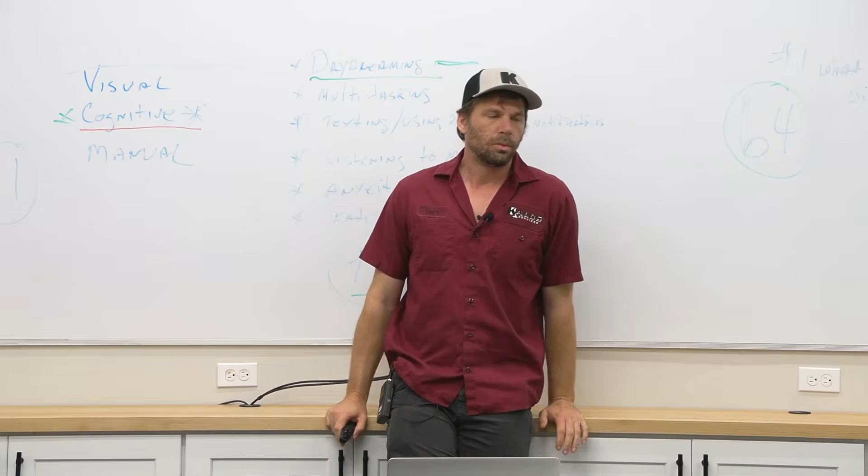We're talking about when you go to a service call and you diagnose a failed compressor, and the process of diagnosis surrounding that. We're quoting a lot of compressors, and we're seeing a lot of compressors quoted without a lot of other notes about the system or quotes related to the rest of the system.

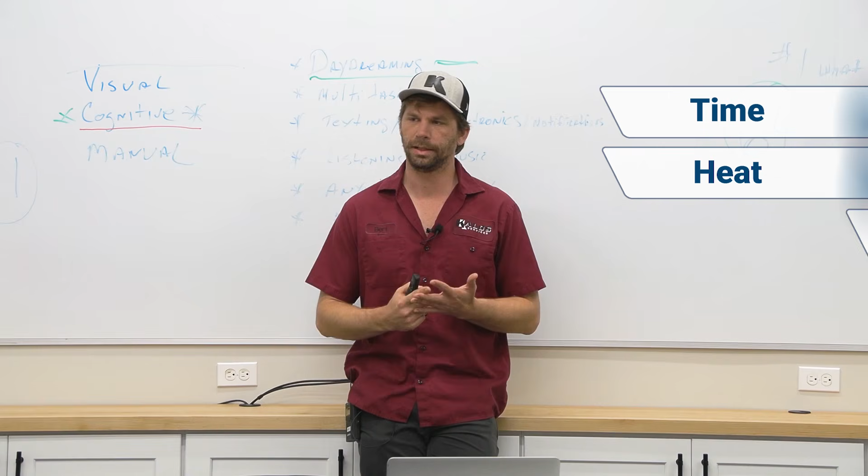Compressors generally are made pretty hardy. It takes a lot to break them. It takes a lot to actually break down a compressor—a lot of time, heat, acid, or electrical issues to cause a compressor to fail.

So when we have a failed compressor, what should we be asking ourselves? What killed this compressor? Who did it? You got to make sure you ask those questions. What in the world killed this compressor? How is this possible?

Acid is one of the number one compressor killers out there. It's also the number one cause for the second compressor death—so you replace a compressor, and the second one dies, the number one cause is acid.

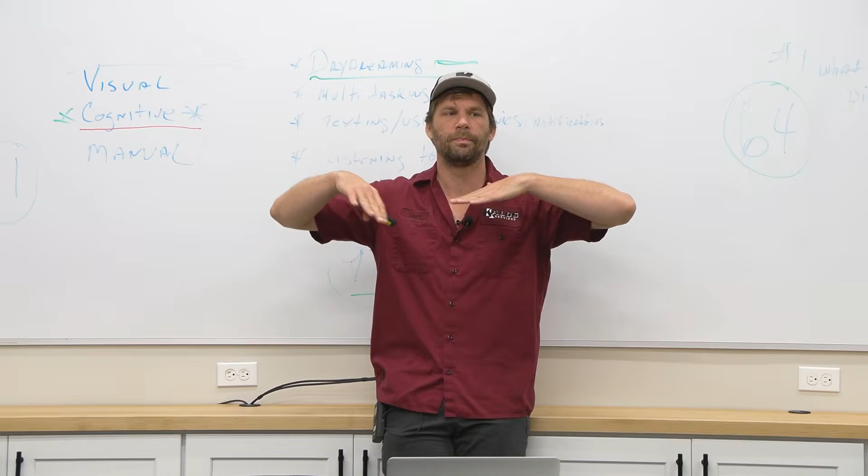Anybody know what causes acid in a system? Water, moisture. Yeah, I'm hearing a lot of moisture. So moisture causes it because with 410A refrigerant, you have the POE oil, the polyolester oil. Moisture in the system interacts with the oil and it becomes a form of acid. That breaks down the oil's ability to lubricate the compressor and keep it running smooth and clean over time.

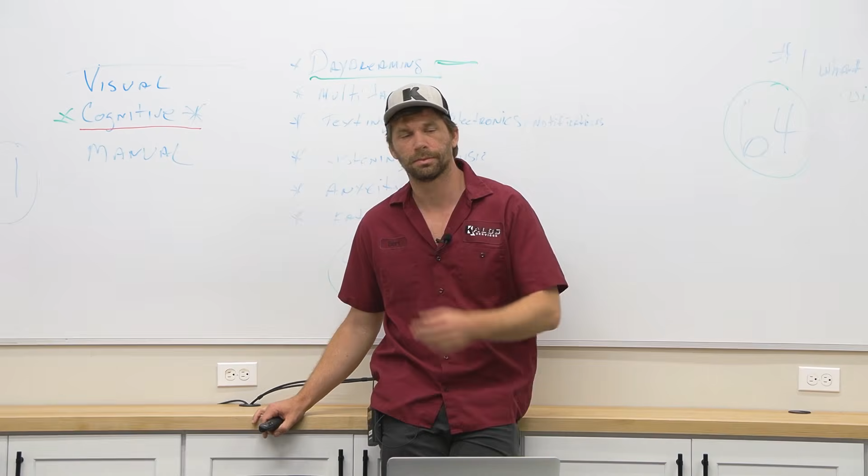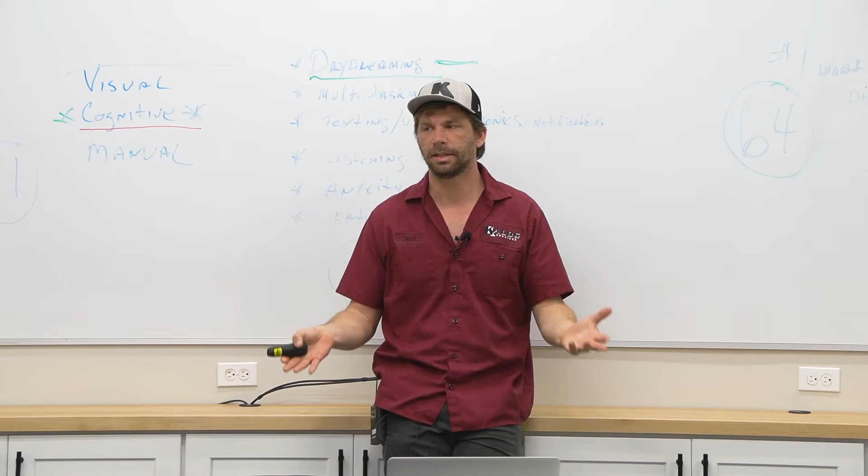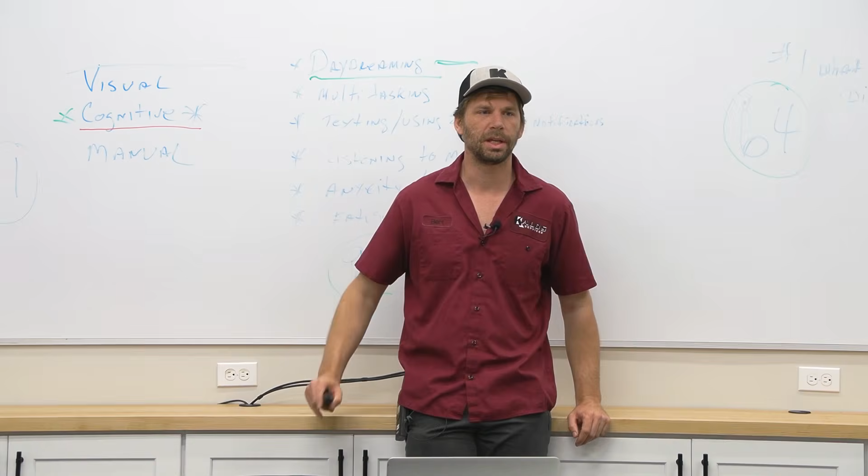But what I want to focus on today is when you show up and you're diagnosing a compressor, we need to be taking steps to address the whole problem, not just quoting a compressor. Diagnosing a compressor is kind of a fun diagnostic hit—it's a big failure, you've just proved something, you've shown that you're a technician. Maybe this turns into a system sale. That's exciting, but we need to slow down right there and run through whatever we can to figure out what killed this compressor.

Another thing that causes acid is high heat inside the compressor. Your compressor oil will deteriorate with high heat. If you have a scenario creating really high temperatures, like impacted, clogged condenser coils, running at a really high temperature can break down the oil over time. Or when you have a compressor burnout, where electrically there's a burnout in the compressor, that really high heat moment can cause your oil to deteriorate. You've got oil in the system that actually needs to be removed because it's going to be acid at that point, and it's going to cause damage to your next compressor.

So what do we do if a system has acid? Or how do we know? Let's start there—how do we know if a system has acid?

Acid test. Yeah, we have different kinds of acid test kits either on our van or here at the shop. There are a couple different kinds out there, but they all do the same thing—they test for acid. It's not like there's different kinds of acid we're testing for, just different formats. I'm sure there are different kinds of acid you could test for, but with what we're working with, 410A refrigerant, pretty much exclusively, yeah.

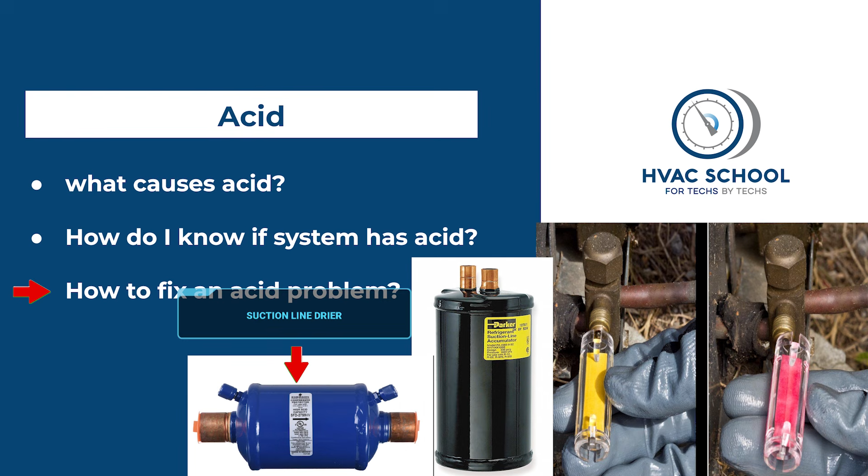Replace the compressor, refrigerant, the accumulator, suction line drier. Yep, it requires a second trip, acid flush, acid away, some sort of acid treatment. And so when you are diagnosing a compressor, that's kind of important to know before you're sending a quote, right?

What we will often do is replace the accumulator because that's where oil will gather in the bottom of an accumulator, right? And so you can't always get all of that out. If you're worried about acid in the system, it's best to quote just replacing the whole accumulator. Whereas on a normal compressor replacement, you can typically take that and dump the oil out, but you're never going to get it all out. If there's acid in there, just quote to replace the accumulator.

And then do you worry about indoor components too? Like does the TXV get damaged or anything like that? No, like Ronnie said, you can contribute to coil breakdown. So if you have an aluminum coil, you need to be thinking about leaks. So that would be our suggestion next.

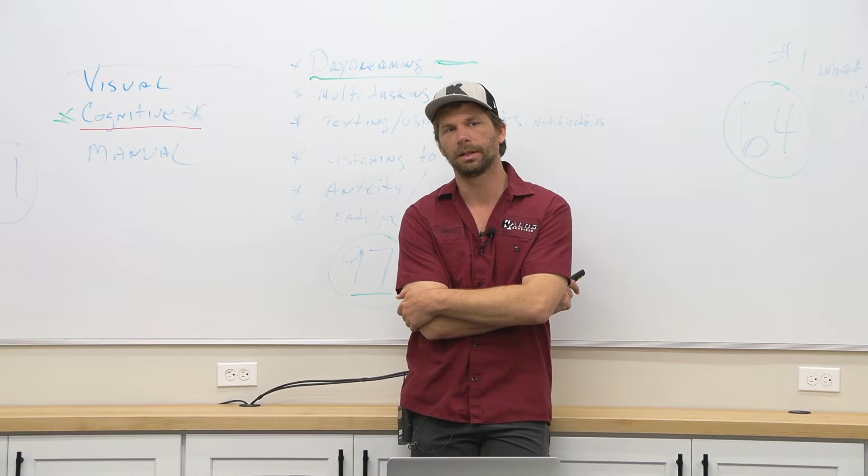If you had like an acid compressor failure, and maybe it's the original coil on a mid-aged Lennox, like an 8-year-old Lennox, and you do an out of warranty $3,700 compressor there, and you know the system has acid, well, that coil's probably not too far away. Gotcha. So you kind of want to keep that in mind if you're going to be quoting large repairs like that. The system does have acid. You could see coil failure in 3 months and then they hate our guts.

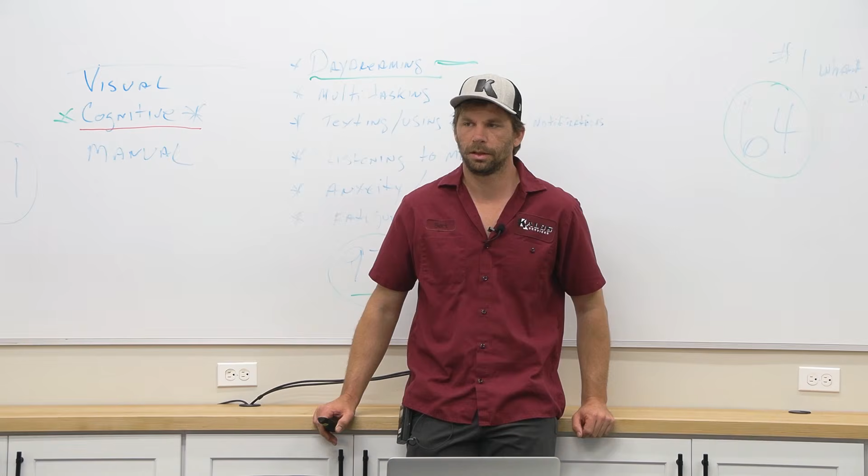Right. Would you do it the other way too? Like if you found a leak in a coil because you were low, would you do an acid test just to see? I guess if you have one, it never hurts to do an acid test. Yeah, but typically if it's through the whole refrigerant system like that, you're gonna smell it.

And that's another point on burnouts sometimes. The oil has been turned to acid, but the compressor didn't run after that burnout event. And you go to cut open a compressor, and all of a sudden it's really strong. You can smell it. There's definitely acid in the system, and you have to stop and take some of these steps, whatever we've quoted, to actually make sure we're not going to be out there replacing a warranty compressor in 9 months.

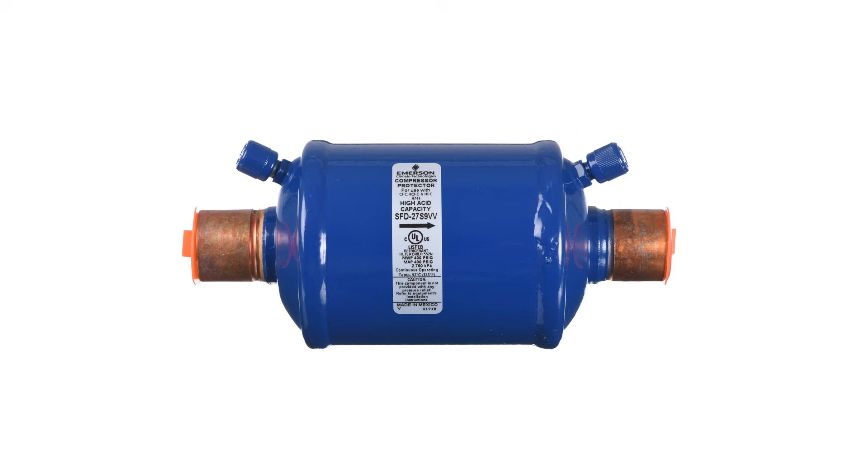And also installing a suction line drier. You notice on the suction line drier there's only a one-way arrow. So when you're installing a suction line drier, it needs to either be inside where the refrigerant is only going to flow in one direction, so between the reversing valve and the compressor, or it's in summer and we're going to be back in 10 days, you put it outside on the suction so we can pump down instead of recovering the whole refrigerant when we come back.

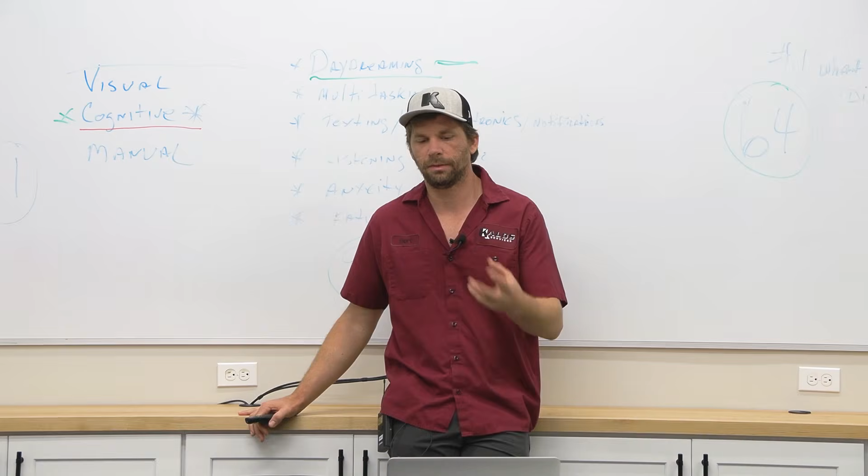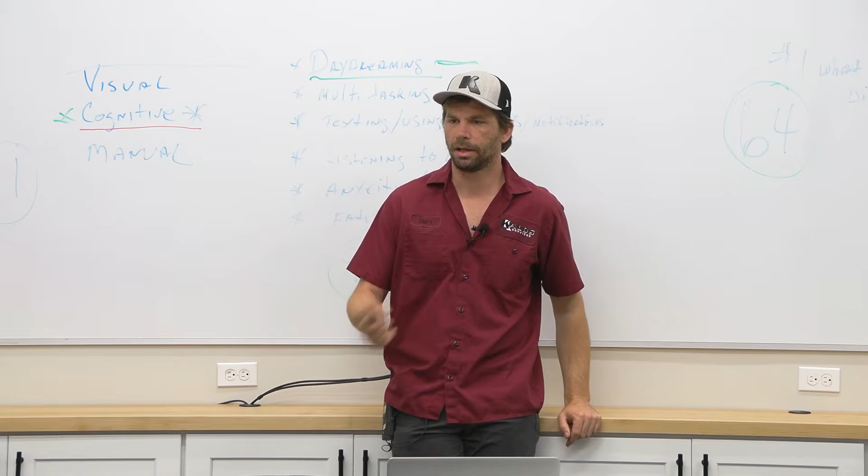So that process is we install a suction line drier and it picks up contaminants in the refrigerant over the next week, 10 days, 2 weeks, and then we come back and we cut it out. Best practice would be to install another one and leave it permanently in the system. That one is full of contaminants, possibly bits of acid that were sitting in a coil or a low spot in the suction line. So we take that line drier out, replace it, leave another one in there. That all needs to be thought about when you're quoting that repair, so Buddy has all the information he needs for sending that quote.

How long does the suction line drier stay in? Usually 10 days to 2 weeks. And then you replace it with another suction line drier and just leave it. But if it's a heat pump, you can't just have an external suction line drier. It's only one directional flow. So you could put it inside the condenser permanently once you had replaced that one after 10 days.

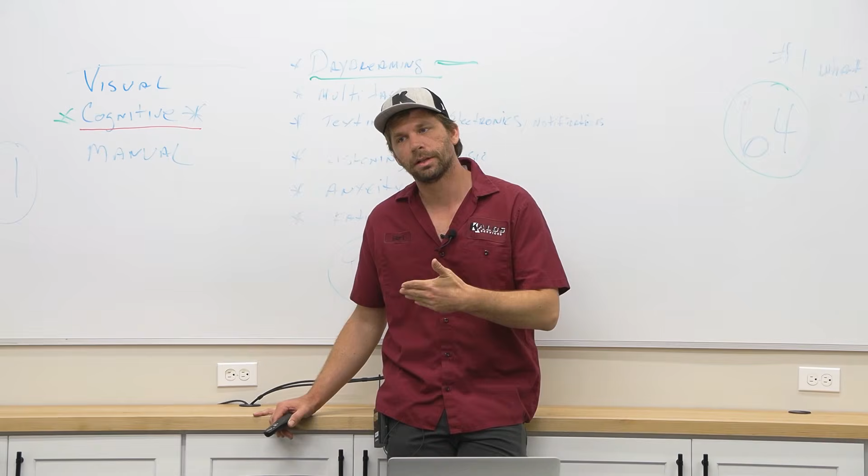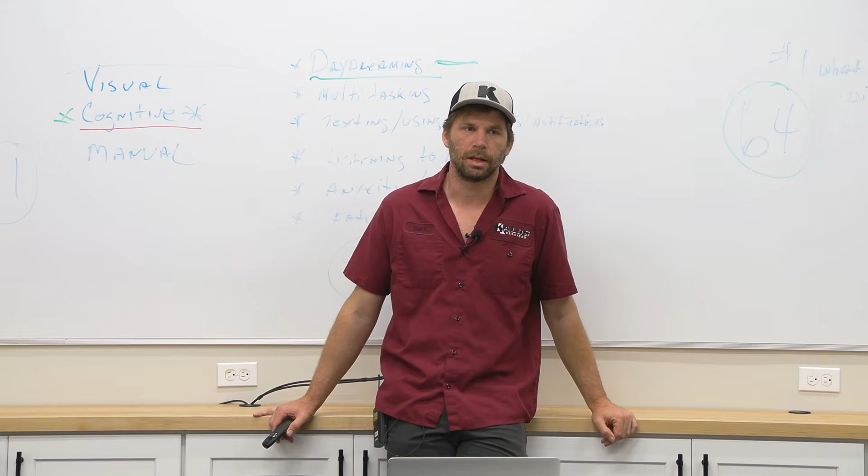But we're not leaving any suction line dryer in our suction line, because in the winter that suction line turns into a discharge line flowing in the opposite direction that this filter is designed for. And if it doesn't completely destroy that filter and knock it through the system, it will blow out whatever it's caught over the years into the rest of the unit.

Airflow considerations. How many times have we quoted a compressor and found things like this on the job, right? More than once. How many times have we gone back to replace a compressor, turned it on, and things look awful? And we walk through the house and find stuff like this. That's why we're having this class, because we can't be replacing a compressor with a coil that looks like this, right?

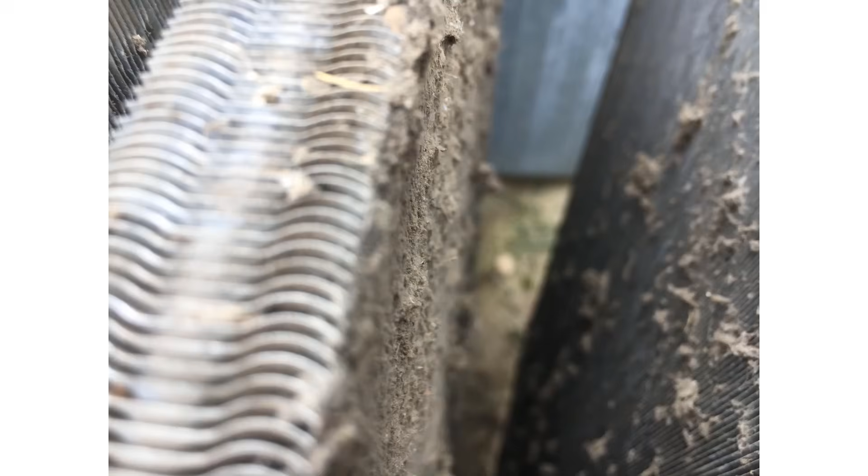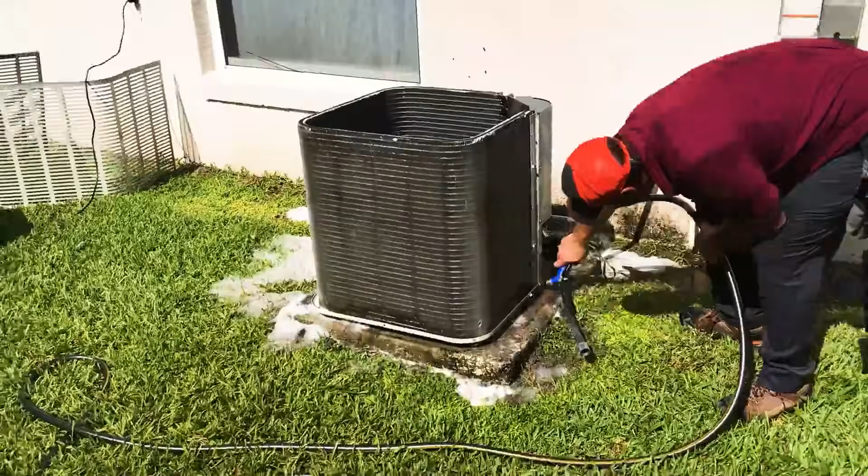Without addressing that problem. When your compressor goes out, how is it the airflow might have affected the death of that compressor? Heat. Okay, heat stays in the refrigerant. Higher temperature, higher heat. So you have the condenser coil here, slam dirty, high temperatures, high pressure, a lot of strain on that compressor. So you should be looking at those coils and making cleaning them a part of that process.

When you're replacing that compressor, if you see dirty coils and it hasn't been quoted, you're still going to wash those coils, right? I said replace, I meant wash. I remember replacing a compressor and finding a second filter. So they had one in the nice ceiling spot, and then right under the unit, another hidden filter that was slam dirty. So the compressor had failed, and for years they had replaced just the primary filter.

Check for issues with the rest of the system that might have caused that compressor failure. Dirty coils, dirty filters. Also, what are some other things for airflow that could cause issues? Giving you some hints here. Blower wheel, collapsed ductwork. Ductwork issues, crappy ductwork issues, right? Things blocking a return. Anything that's going to cause low airflow could create a slugging situation.

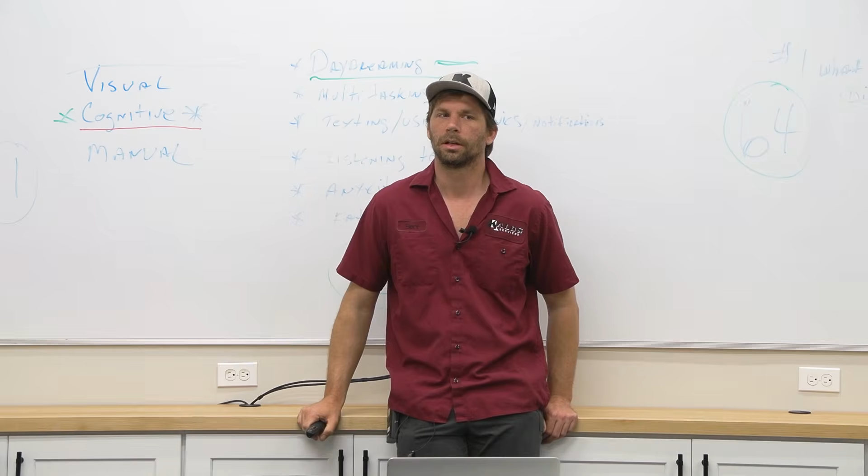So if you don't have enough heat on your coil, you don't boil off all the refrigerant. The heat comes from the air. So if you have an airflow issue, then you potentially are not boiling off all the refrigerant through these run times. You combine that with a home where the customer likes to keep things cool in their house. Now we have even less heat to work with. The compressor has these long run times where liquid is making it back into the compressor.

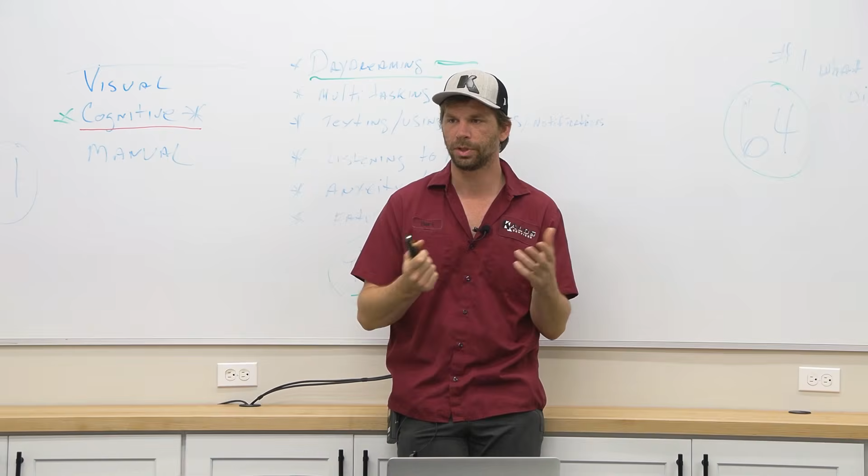And that can cause two problems. It can turn off and the liquid will kind of migrate and accumulate there, and you have that start where the compressor tries to start and it's just hitting liquid, which can destroy a compressor. Or you could actually have long enough run times where liquid fills up the base of that compressor and gets to the point where the compressor is attempting to compress liquid, and liquid doesn't compress well. Liquid will destroy a compressor instantly.

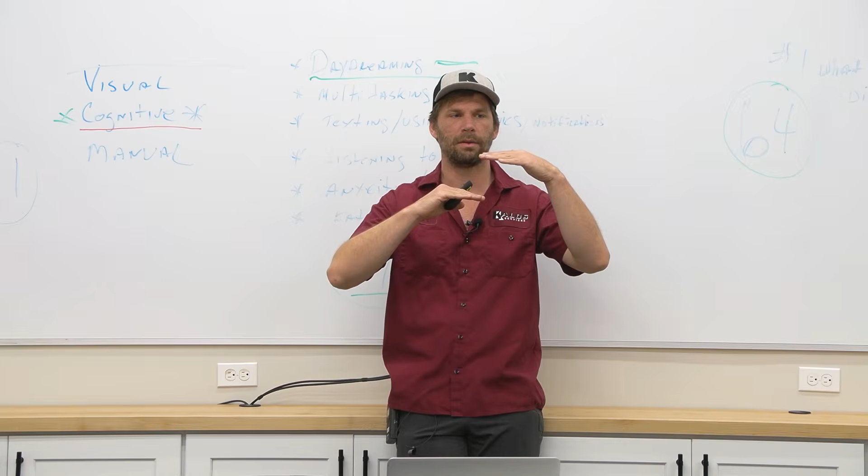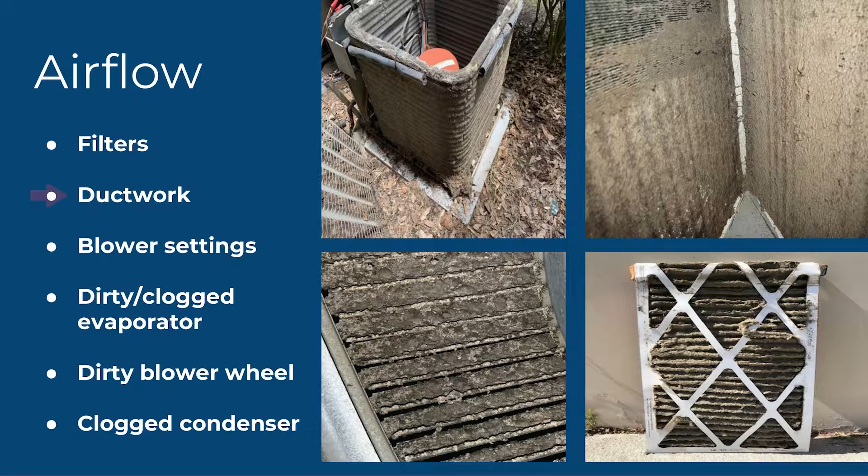So you do have some wiggle room if you have an accumulator or the base of your compressor to fill up with liquid before it actually starts compressing it. But if you have a situation where really poor ductwork is contributing, you have systems freezing, things like that, that could be exactly why the last compressor failed.

And we need to address the whole problem before we come back, plug in our compressor, turn it on, and we have this crazy low suction pressure and temperature, and now the customer finds out they need to replace the ductwork under the trailer. And maybe that would have influenced the whole decision in the first place, with a system, something like that. Those things are really important to know ahead of time.

On the airflow side of things, one other thing to look out for, damper systems. So if you're on a unit that has a damper system, go through and check your zones, check your airflow, make sure it's opening and closing properly. Same thing. It's good. I erased damper systems and put clogged condenser on here.

I would say a thing to remember too, like, let's say you have a failed compressor, and you're like, man, their coil looks really bad. I can't quote a coil and a compressor. That would destroy their budget. Who cares? They need to know the whole truth. Yeah, it's very good. So you have to go in and tell everything you find.

Even if you're gonna give them a quote that's like $8,000 and they're never gonna go for it, it's like, you're not getting a call back. Could sell a system and leave them better off anyway. So yeah, our job is to be a technician and not to worry about their budget and their decision making for their home. We just need to give them all the information that's relevant to that unit and be honest. Yeah, don't shy away from doing your full job.

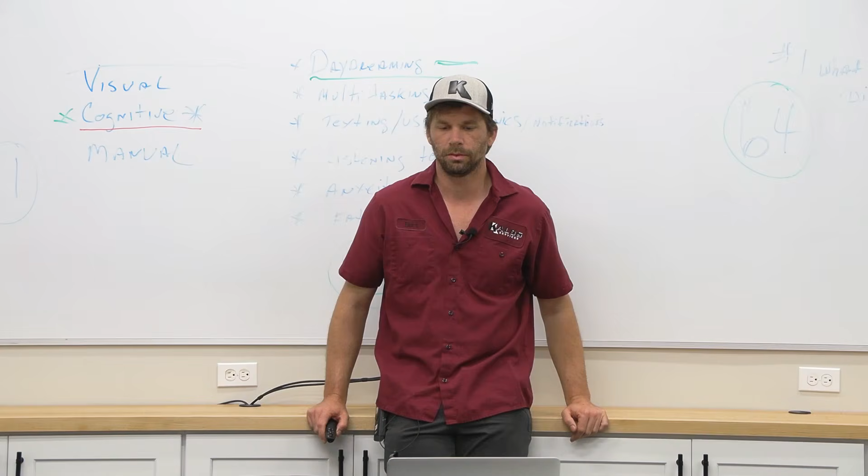Yep. Requires refrigerant to cool it down. It's running hot. It requires refrigerant to cool down. Compressors are refrigerant cooled. You run not only hot, but you also have a lot longer run times.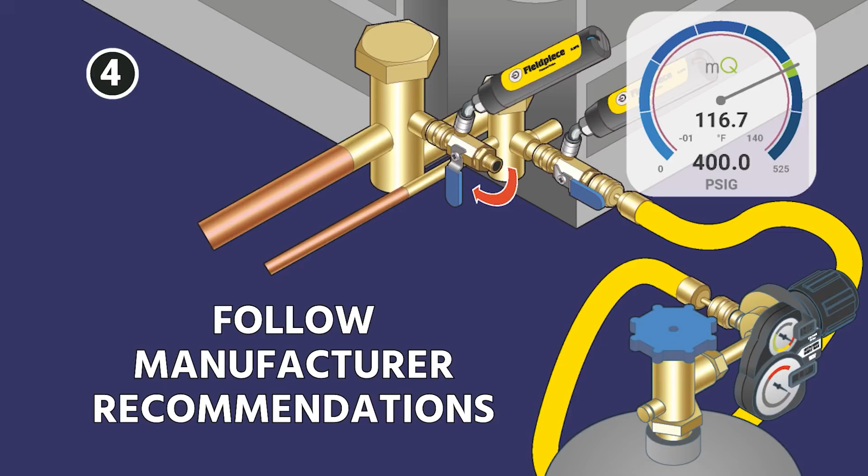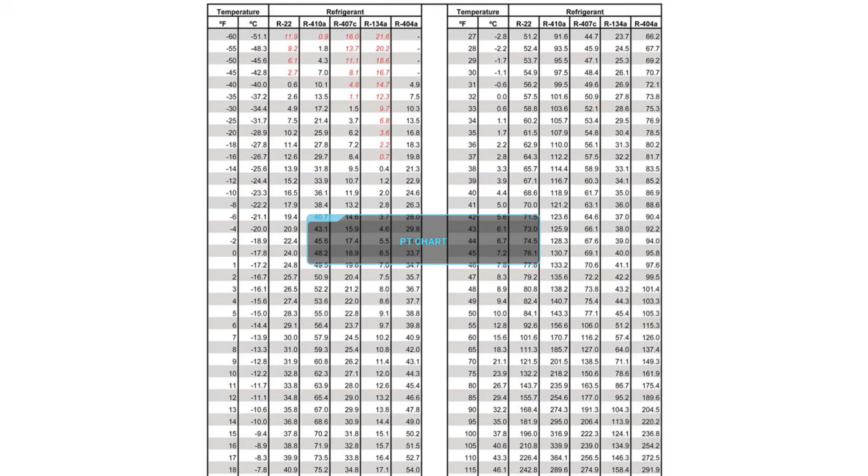How could you maybe find low refrigerant if your compressor's failed and you can't run it? Standing pressure. That's right. Put a gauge on it or something and see what it is. But if you don't know what it should be, it doesn't matter what it is. Based on temperature. Mm-hmm. Keep going. There's a refrigerant slider. Yep. So you need a PT chart, refrigerant slider, and what temperature?

Saturation should be the ambient. Yep. Saturation's ambient. That's inside, outside, sort of combined. But the majority of the temperature affecting your refrigerant is outside because that's where most of your refrigerant sits, right? But it's affected a little bit also by inside temperature. If the blower's running and it's 90 degrees inside, it would be slightly higher. But usually you can just compare it to outdoor ambient temperature, and that's the saturation temperature you should have on your refrigerant.

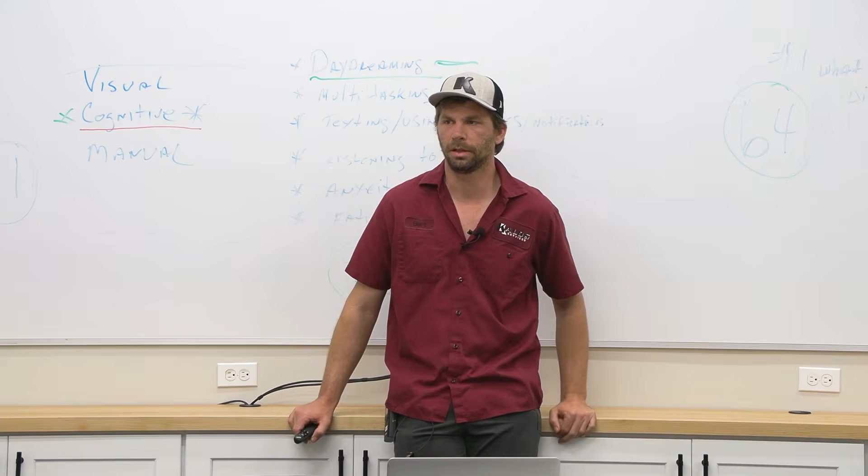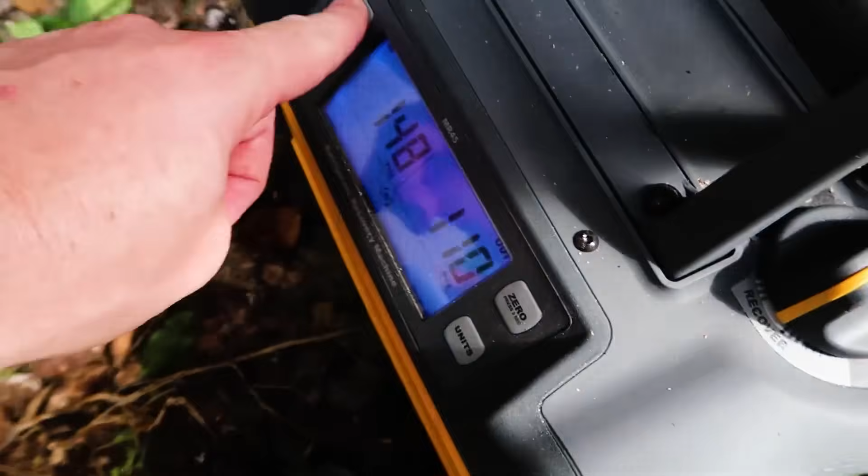Now, if you're just slightly low, you're still going to have a pretty normal saturation temperature. It takes a significantly low system, but it's also a pretty embarrassing miss for a technician who comes back with their compressor and what's the next thing on the list? Coil leaking. They weigh out the refrigerant and there's only 3 pounds on a 7-pound system. So when you are actually coming back to do the compressor, weigh the refrigerant out. Because you do need to know, before we braze in this brand new compressor, if we're low on refrigerant.

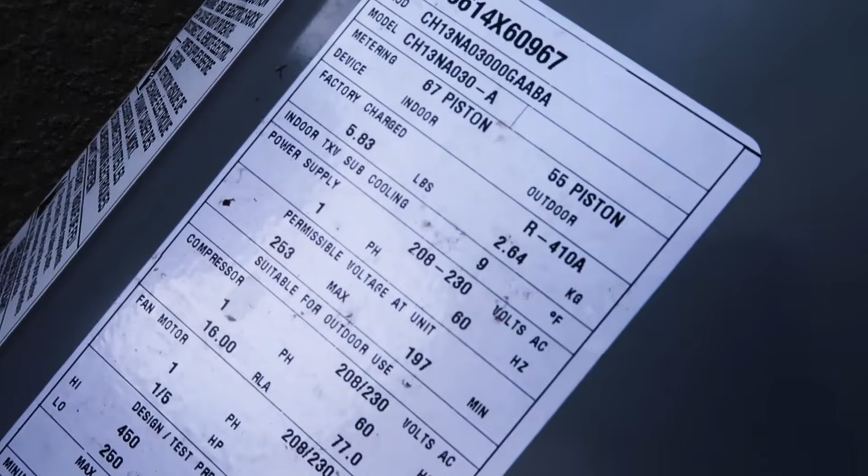You might be a pound off, but if you've done a full recovery and the purge cycle and you watch your system and it doesn't really come up after that point, you know you've got all the refrigerant out. But yeah, always weigh out your refrigerant to know what's going on.

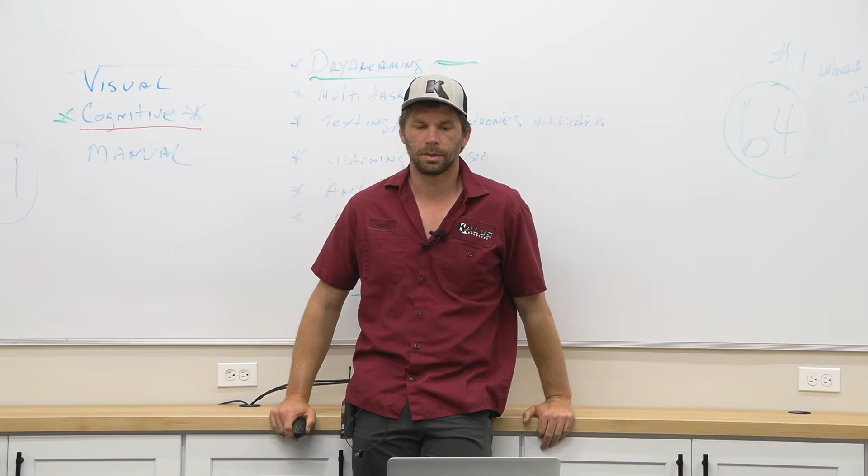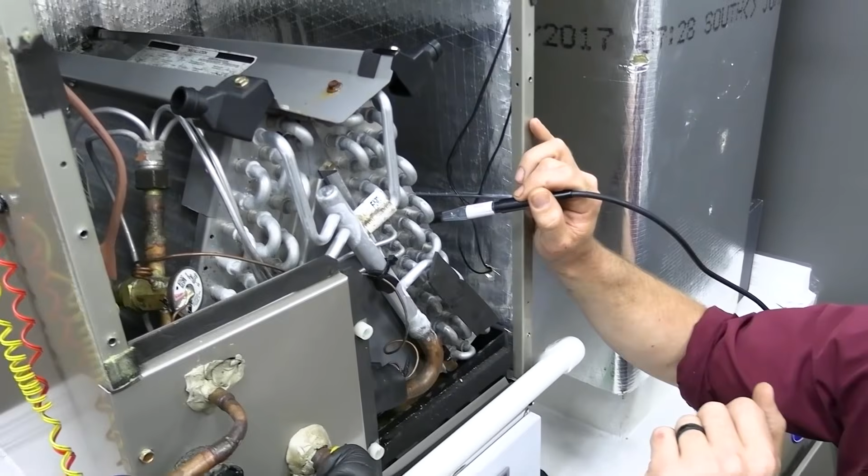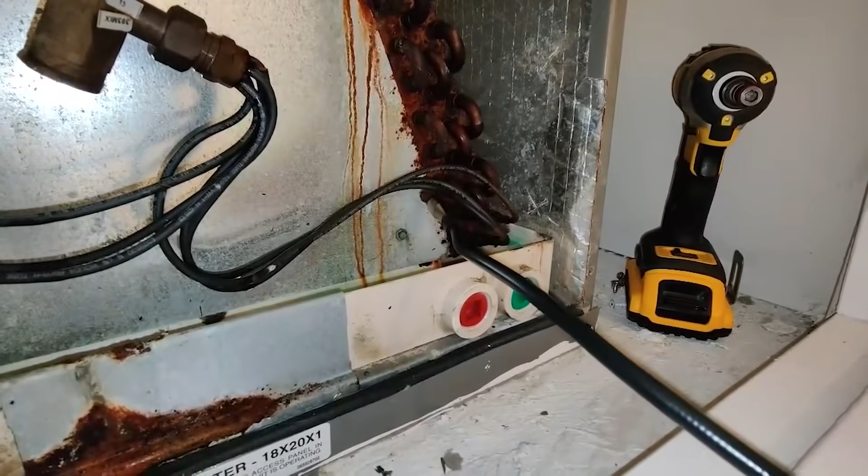Doing leak testing. So this is what Matt has brought up several times in this class and he's very passionate about because he's been burnt before. He's had to do compressors where there were leaking evaporators on the inside. I think we all care about this. But when you are quoting a compressor, depending on the age of your system, you should also be going inside and doing a quick electronic leak test on that coil, at least looking at the history: maybe we've replaced the coil, how old is this system, maybe a TXV's been replaced in the past. Is there reason to think there's issues with this system?

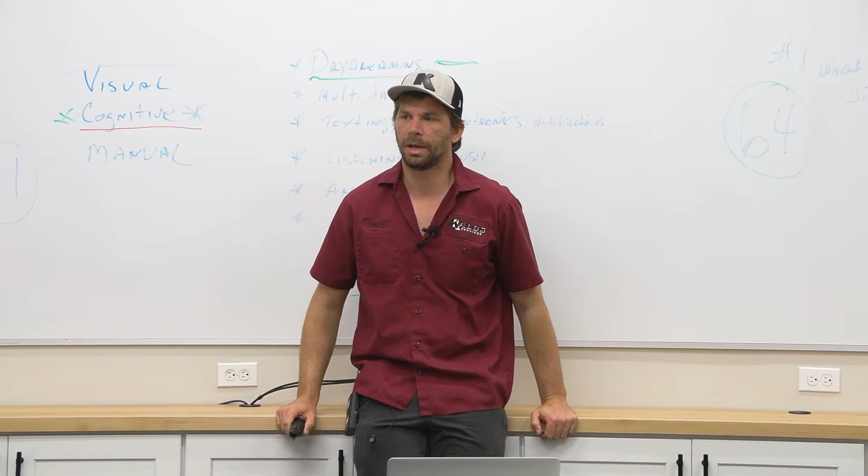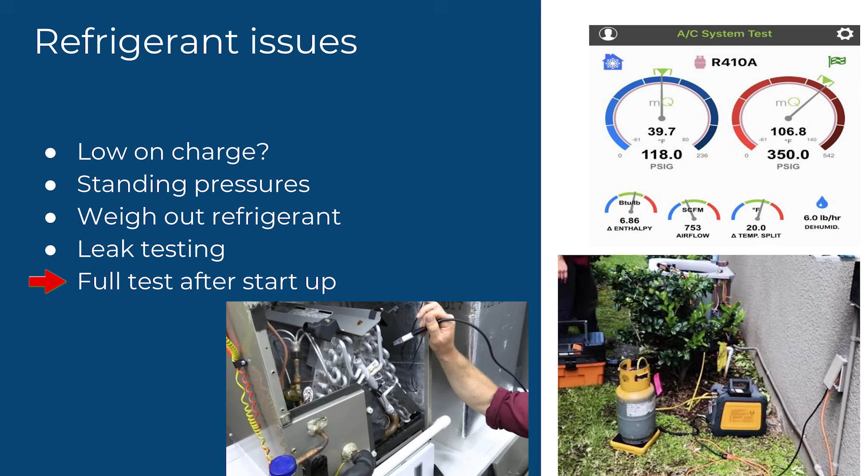A leak test is a 10-minute thing you can do on an evaporator coil before sending a quote for a compressor, to save us a complete nightmare on the back end, showing up with a compressor and not being able to pull a vacuum because we have a leaking coil, right? We need to be ready to do a full test after we start up our compressor because it could have been a refrigerant flow issue, TXV, something like that, that caused the last compressor to fail, and there's not a way to test that beforehand.

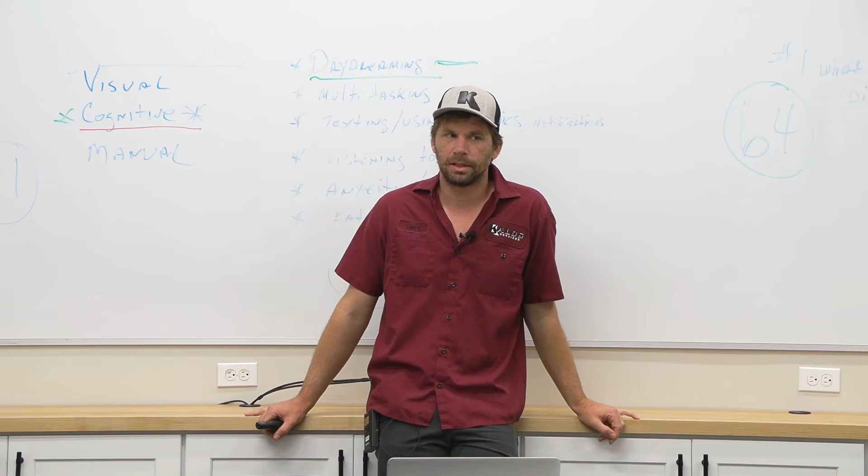And those can be difficult conversations, but just stick to the facts. Your compressor was not running, but now that it is running, we see that the TXV probably contributed to its failure, so we've got to take care of this now. And that's something we want to take care of same day if possible, as fast as we can.

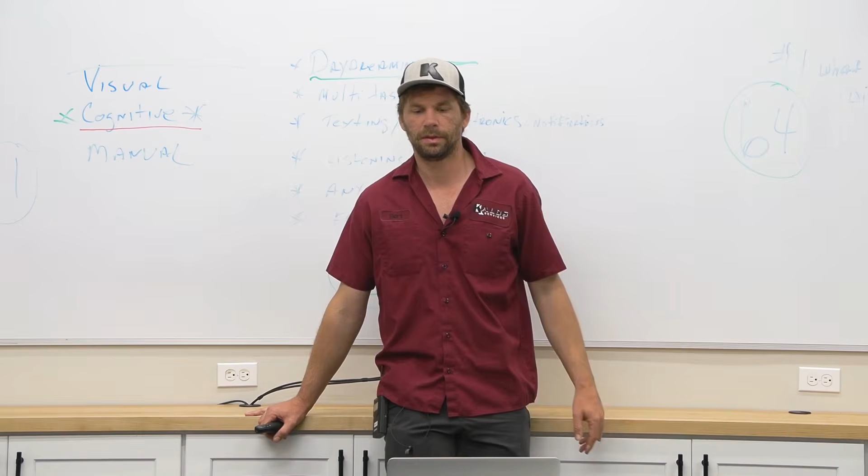Mentally, it can be very difficult to think you're finishing this project, I'm finally done, let's test it out, and boom, there's a problem. That can be one of the hardest things as a technician. But again, that's what we are, we're technicians. Simulate the best that you can a normal day, and you'll see major problems at a minimum.

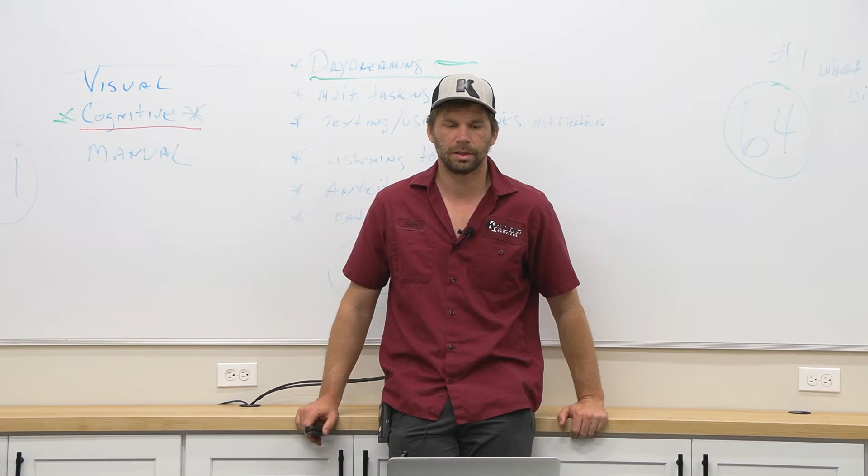Okay, electronic issues that take out a compressor. Capacitors and hard starts. Don't quote a compressor and then walk away if it has a hard start kit and a capacitor that you didn't check. Right? How would you check a hard start if the compressor's failed? Put your MFD on it. Yeah, MFD is about all you can do on that.

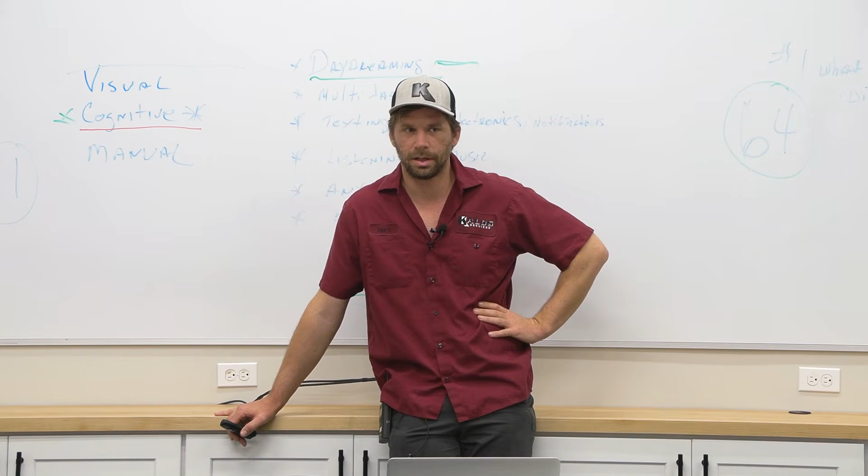So good practice, hard starts failed, or a compressor's failed, we're replacing the hard start kit with the factory hard start kit, if it's a factory hard start kit. If it just has some hard start kit on there, we're not putting a new one on with a new compressor. But if from the factory they recommend a hard start kit, then we're replacing it with a factory hard start kit when we're changing the compressor.

What else? Electronically, pitted contactors. Stuck, yep, you need to be really looking at that and thinking about it. Another good practice is to just replace the contactor when you replace the compressor. But at a minimum, get used to looking at what could have caused that compressor failure. Things like pitted contactors, it can get stuck, melted in place.

The compressor runs continuously, or just that short cycling, voltage drop across it, that all those things take out a compressor. Wire damage, how could wire damage contribute to a failed compressor? Exposed wires, it could run all the time like a stuck contactor.

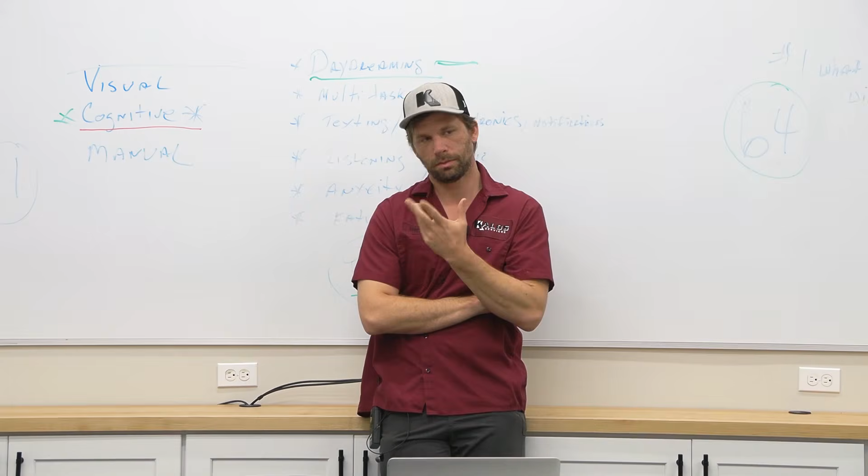So you have exposed wires that can create a short where it runs all the time. Or I also have here short cycling. You can have wires that are causing short cycling, either poor connections or the short is happening enough to chatter your contactor.

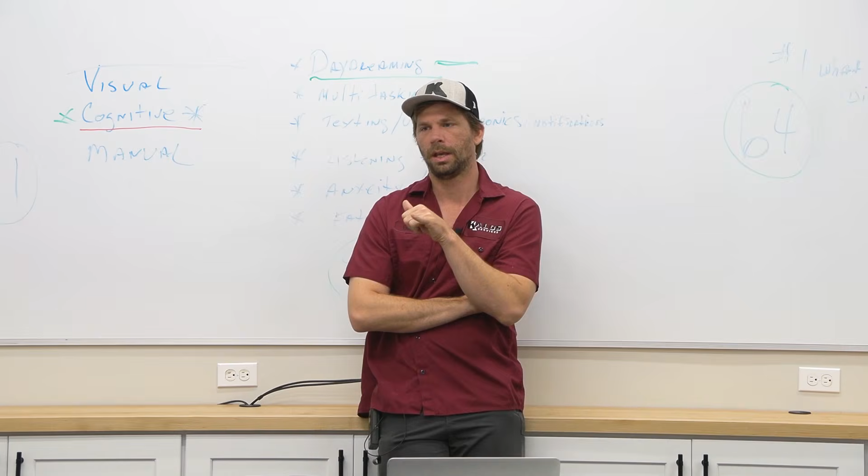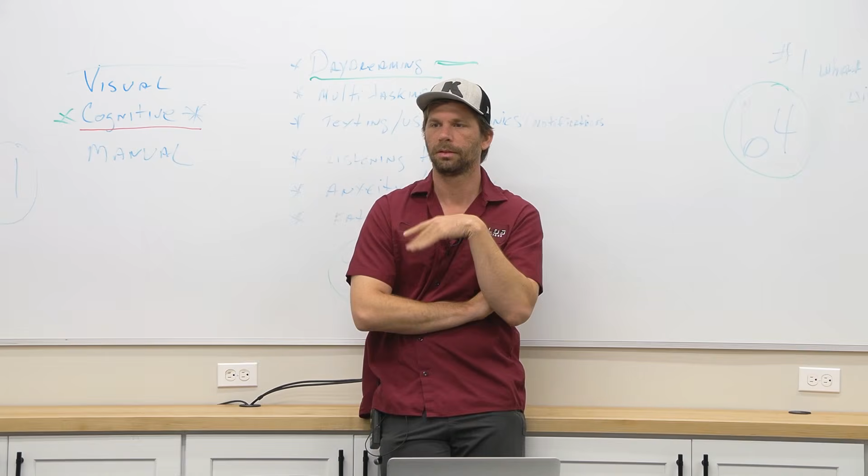Bumping the float switch after maintenance while the system's running. Yep, things that cause short cycling. So if they have a float switch design that pops straight out without a trap and your compressor's failed, I'll often just be dumping water, looking in that pan, to see if maybe the water level's been at the level of that float, which would cause that float to be chattering, causing short cycling for the system. Inline float? Like an inline or just straight out of the pan. Yep, both of those things could cause short cycling and your compressor repeatedly running backwards.

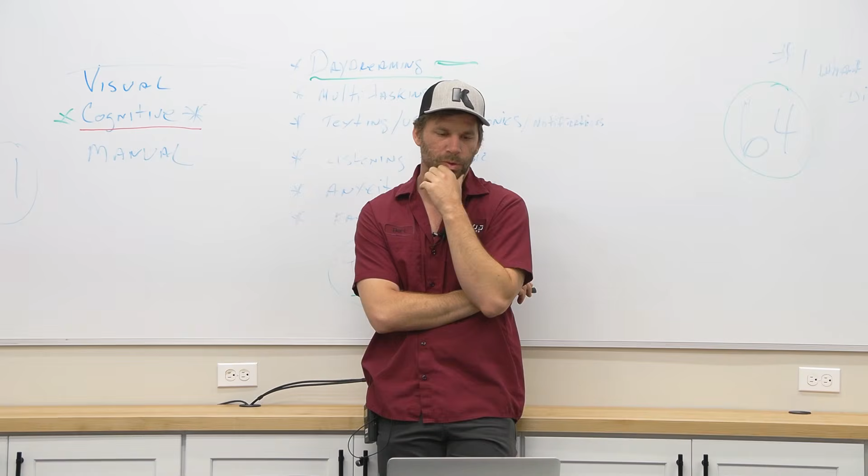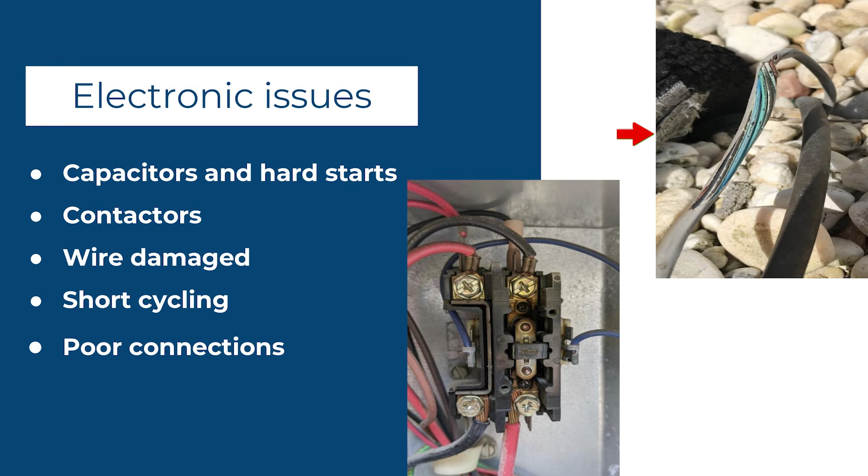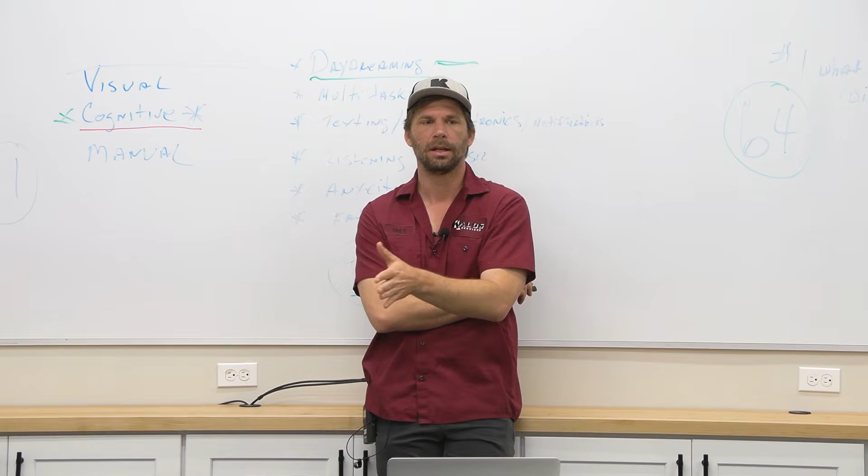Not good. Things like this low voltage picture I have here could be this type of stuff that you want to throw in with your quote. Any improvement things you can do on the system that are going to be long-term really good for this customer. When you're doing something like a compressor, you can add several minor things that completely improve the system and also prevent stuff that maybe you didn't realize could have caused it. Like this low voltage picture here could have caused chattering, contactor, short cycling, that sort of thing, right?

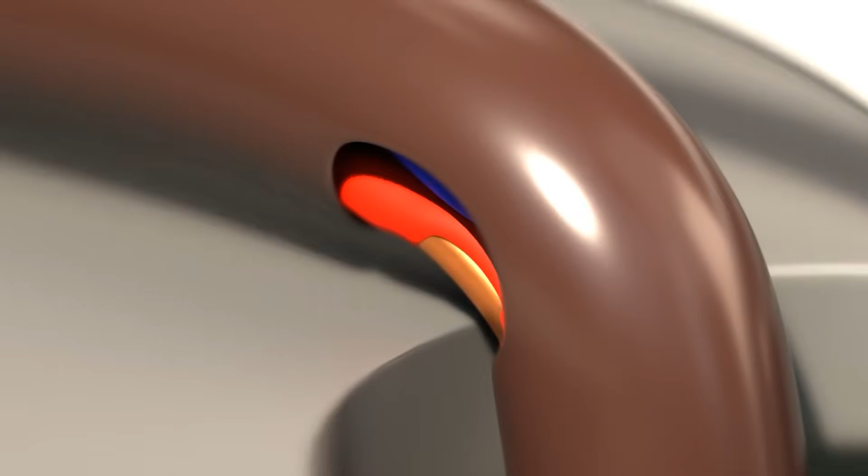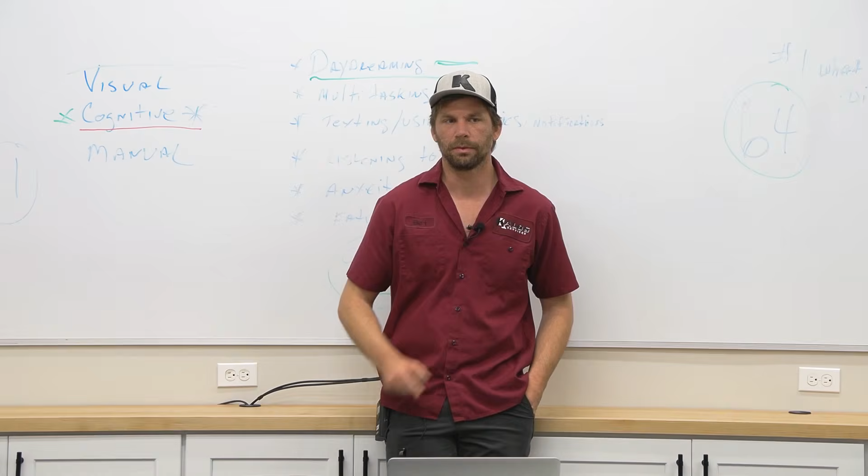So when you find a compressor failure, look over your entire system and look for anything else. One other thing, in general, just good practical advice with conversation with the customer: let them know when you found the reason for failure, and when you haven't found the reason for failure, let them know. It takes a lot to take out a compressor. Don't really know the story here. I've checked everything I can, but it's possible we have a refrigerant issue. We couldn't know that until we get it running. So letting them be aware of the full situation, that's important.

If it's acid, you know what's going on, and they need to have that conversation. Their compressor replacement is going to be a lot more expensive than maybe they've expected or what they Googled online, because now we have acid protocol. So having that conversation also sets us above competition if they get a second estimate and no one mentions acid. We've already mentioned that, we've quoted for it, it's part of our process. So just be thoughtful with your customer interaction as well.

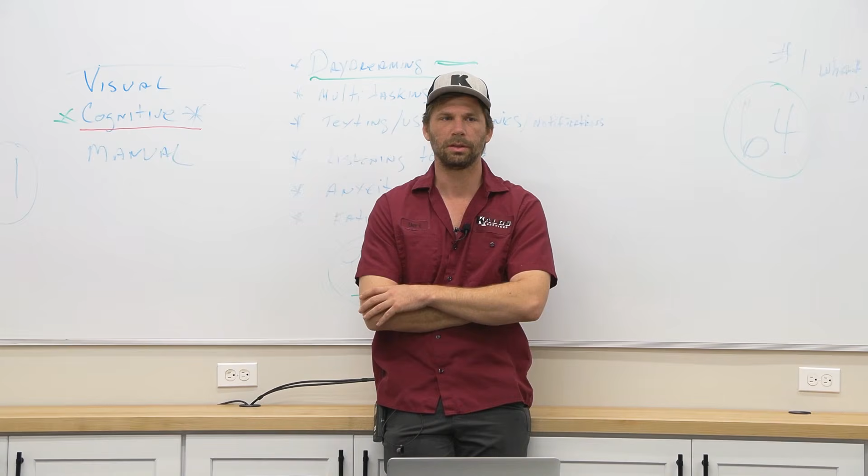And last but not least, don't force a system sale with compressor failure. We are happy to make money doing a repair if that's the decision that they want to make, and we're good at that. We're set up to do that well as a company. So make sure you give them their full options.